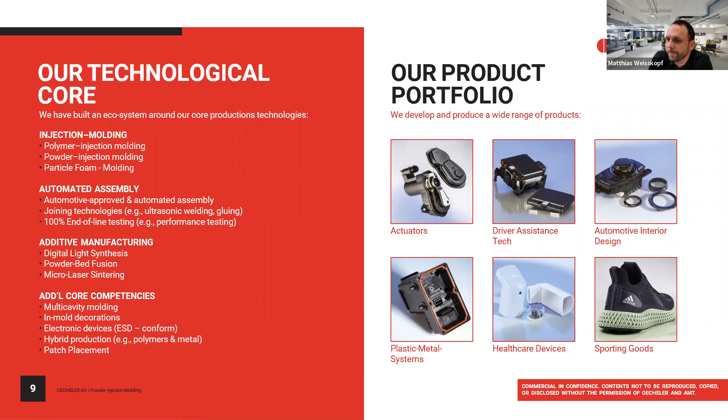You have to offer a huge variety and therefore also a huge variety of post-processing solutions. And that is mainly one of the reasons why Joseph, or AMT, and Oechsler started this program. So Andy, you can hand over to the next slide.

As Matthias mentioned, Oechsler is a productive company using additive manufacturing for regular production. I think that's also the main difference between Oechsler and a regular service bureau or a service partner. We are not the regular printing farm who does prototypes, one or two parts, and then never seen again. We are really going for serial production on a long term, meaning the product is going quite a little while.

Therefore, from a printing fleet, as we do serve kind of all industries, you need to be able to serve volume. Meaning we are running right now 150 printers in serial production plus development printers. We always have one or two not-yet-available serial equipment in development, just to be ready for the next topics. Our turnover in parts is around 1.3 million parts per year, and here it's really a continuous project work and production, meaning bigger projects, really also projects with 6 figures when it comes to the customer needs.

For sure, you see here now four technologies. Even a liquid version, which is not the focus for today, but this was one of our earliest technologies we did bring into serial production. Now, today, it's really the focus for the HP technology and MJF, and I think that's really the key.

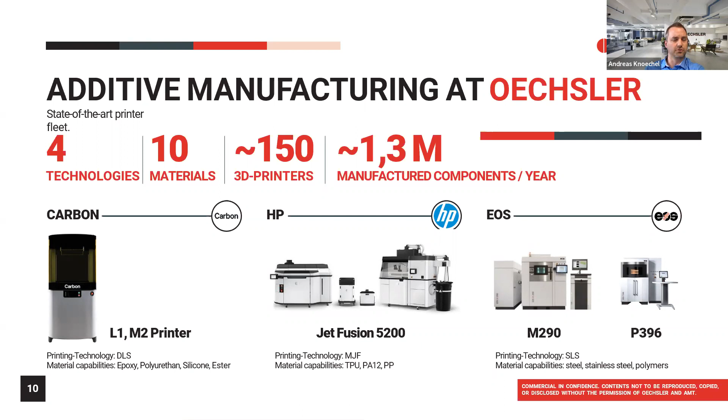So when we started in 2017 with the additive topic, we clearly evaluated the potential, and the result was that we don't want to replace, or that it doesn't make sense to replace, injection molding. We have more than 200 injection molding machines worldwide, perhaps even more than 300. Injection molding is a process that is well known and that can be really cheap even for large quantities. So what does that mean? You need to offer products that present new possibilities that a classical manufacturing technology cannot offer. And this is where we started with the lattice topic.

So lattice doesn't need to be a flexible material. It can also be a rigid material, but in general it is a special version of structures. And when we started in 2017, we realized pretty fast that there was also no software solution on the market to generate those lattices.

It's almost the same as the link to post-processing or to manufacturing technologies. There is, of course, software generating lattice, but we need a linkage to, for example, mechanical properties of a product. A customer in additive doesn't want to have five different correction loops until he receives the first part that somehow manages his requirements. You need to hit, hopefully in the first shot, the requirements the customer wants.

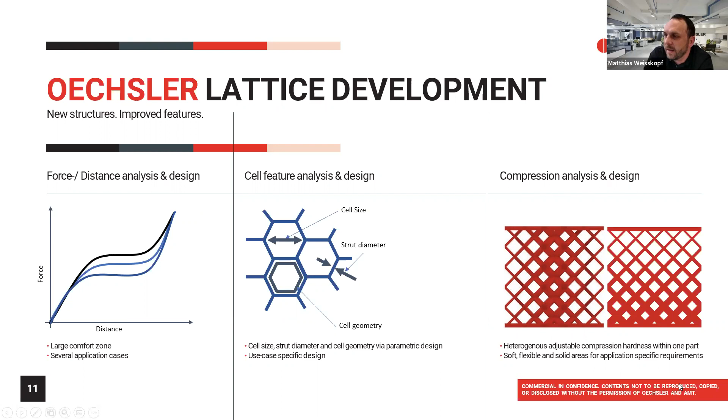deviation of the CAD file to the real product has a huge impact on the performance of the product. So that is the reason why we need end-to-end means, starting with development until the last production step, and linking also the results, also the quality inspection, as the more products you produce, the better the database for your product development is. And Andy can give you now a short overview about the products we are talking about.

So what you see here is, I would say, a small variety of products but a wide range of industries. Meaning, Oechsler sure is working a lot in the field of automotive, but in additive manufacturing we are almost completely open, I would say. Why? Because we do see here the possibilities and opportunities really to bring different functions into different products.

What you see here on the left side, it was one of the starting projects. It's the automotive seating—one seat project is already live available. It's a Porsche sporting seat. The complete inside is made out of additive manufacturing lattice components, meaning we took the foam out, brought new parts in it, and here you can completely adjust the hardness like the driver wants, or even have different seats available depending on whatever the driver wants to have—soft, hard, middle, medium.

But also for sure the ventilation, the height is different, meaning we do need less volume. In the weight direction, by saving less volume, you can save a lot on the rest of the seat. So you see, it's not only about a new technology and something new going into a product and the customer only takes it because it's new. No, there is really coming more and more benefits into the product, especially in that serial production or available serial production.

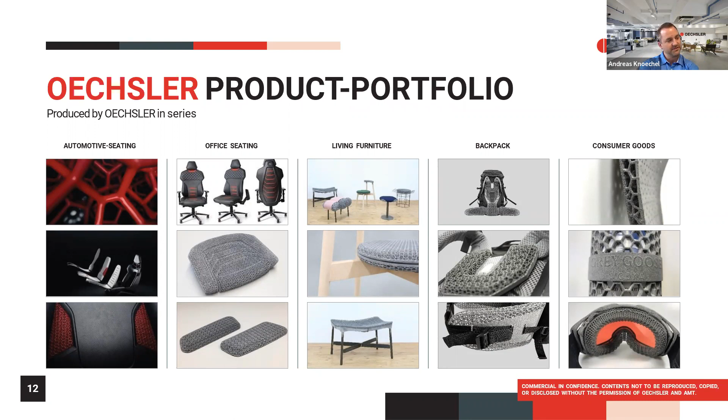And maybe, Alicia, if you would please slide to the next page. Andy, not to interrupt you, but there was a question, and I think it's right to answer it here.

There was a question about an example of a lattice product of a rigid material. I cannot mention the product itself, but I can describe the functionality. It is a crash element. The normal standard product is a hybrid part, a complex part of plastics and metal combination, to absorb a lot of energy in the crash case. And you can reach the same result just by generating rigid lattices, but you save roughly 70% of weight and a lot of space. And it is not used in mass production because it's really a challenge to convince customers

changing and challenging the existing technologies and the existing product development techniques. But those are examples, for example, for a rigid lattice product. Hopefully it is answered.

Coming back to our post-processing issue, what you see here somehow looks like the regular depowdering method you're using all day long. On the left side, it's still packed. You take it out of the printer. You see it already, two hands, meaning everything manual. Unpacked, especially on our lattice products, everything is completely full of powder. Still after the air blasting, it's not clean at all.

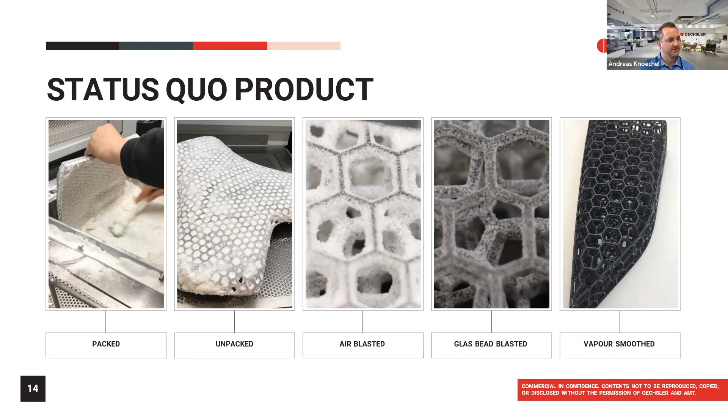And that's really what it's about today. Within the partnership of Oechsler and AMT, we are bringing a solution to the table which does the job faster, easier, simpler. And I think the next slide will show us that it's not only that we need it for scaled production.

What you see on this process flow cost scenario: the machines, sure, they do cost quite a bit of money, but by having everything handled from step 1 to step 2, having everything controlled, being so precise, being careful everywhere, you do see almost two-thirds is the labor costs.

And when it comes to our customers and products, I would say within the top two questions, one question is: why is it so expensive? How much does your product cost? That's why we really have to tackle it on that side, to bring 3D printing into a more simplified costing structure.

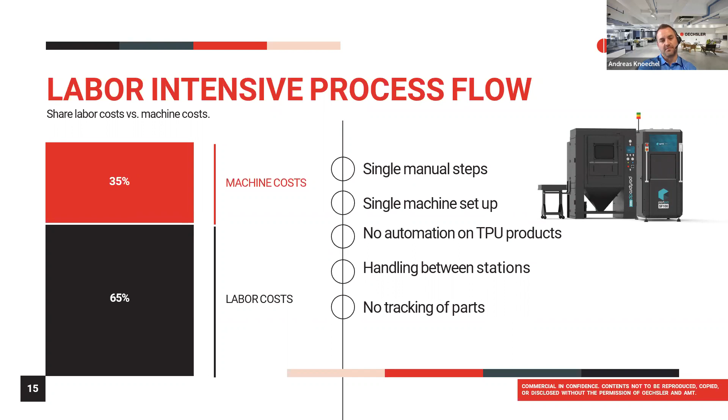And on top of that, but I think later on we come to that, there will be not only a costing topic—there will come quite a lot of other benefits when we solve that issue.

In parallel to this, it's also, of course, the variety of products. So it's different if you have a small product or a huge product, if you have a vapor-smoothed product or not. So the process steps are different and they are not leveled. So what does it mean? You need to have a flexible production solution, and just multiplying different single machines will not solve the issue.

Even when you put some interim automation inside, it would also only be a one-time solution. So it needs to be a flexible solution. And even when Andy mentioned the post-processing, we shall not forget the pre-processing, or what happens after the post-processing—reusage of material, being prepared for the next print jobs, and of course 24/7 manufacturing so that it is efficient.

That is the challenge. Thank you, and a great summary of the current status quo, highlighting that even with machines to automate the manual workflow, it still doesn't suffice in terms of producing the full end-to-end scalable production.

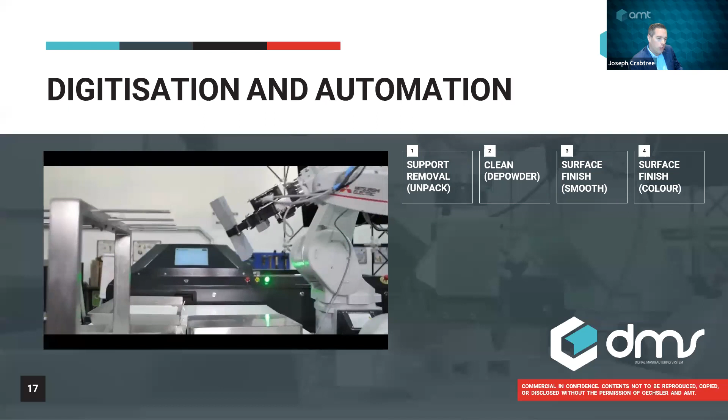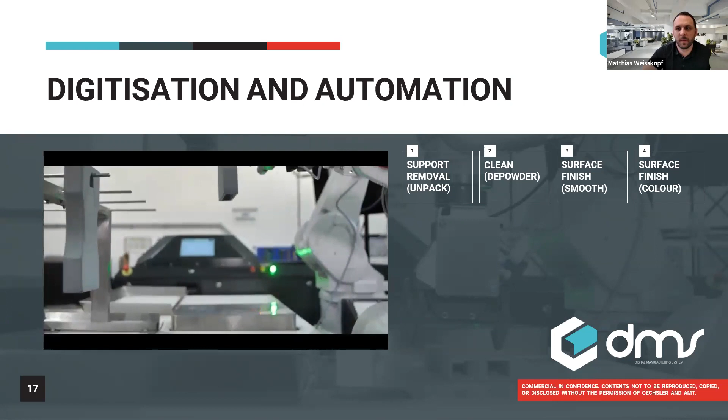So with that said, we're going to talk a little bit about what we're doing in terms of the partnership. This really is about the full end-to-end automation of the process flow. So we don't just mean individual modules which are not scalable; we mean the complete integration of all of the key process steps.

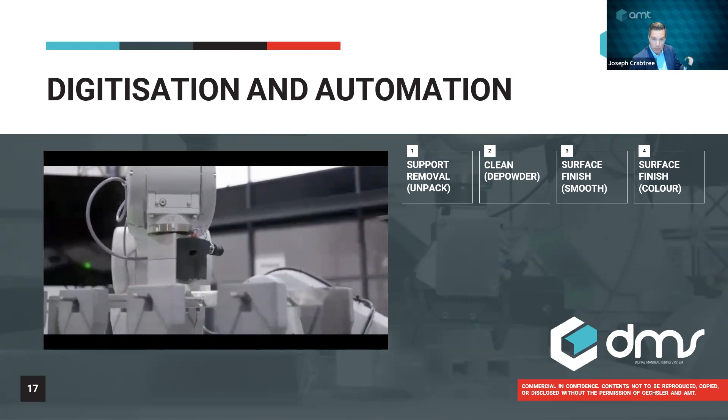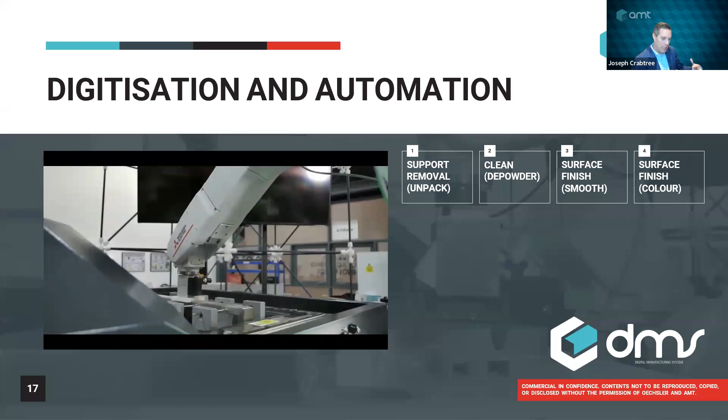Those process steps, as Andreas and Andy were saying, were unpacking, the removal of the part from the printer, the cleaning—which is very complex on lattice structures and this flexible polymeric material as well. And once we've done all that cleaning, then there's aspects of recycling and powder management that we need to deal with as well.

Once we come out of that, though, we need to deal with the surface finish. A lot of the applications we've discussed and shown are consumer or critical aesthetic applications which need a very good surface finish, i.e. to be smooth.

And/or to be colored to a certain color hue or matched to a certain specific coating, for example. So really this whole process isn't just about removing the part and cleaning the part, it's about how we functionalize

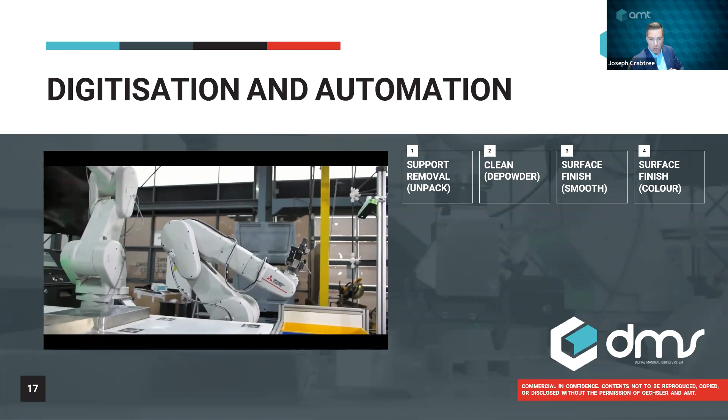the surface, how we improve the surface, and how we automate the full end-to-end workflow. So this is in essence what we're doing with Oechsler. We mentioned before it's not good enough just to add machines. So if you've got a number of printers, we can't just add more and more post-processing modules.

So AMT and Oechsler have developed a fully integrated solution that allows you to truly scale additive manufacturing. This is a representation of the cell that has been developed. We'll be releasing more details in due course over the coming months. But in essence, I'll just walk you through the workflow from a fairly high level point of view at the moment.

This is a scalable solution. What I mean by that is that it works with any printer platform, it works with any materials, and it works with any number of printers. Our ideal number of printers per cell, per manufacturing cell, is around 10 printers, and we classify those as 10 industrial printers. In this case, it's the HP Multi-Jet Fusion 5200 platform.

So we're talking high volume industrial printer production and a high number of parts serving these cells at once. We then need to manage those printers. So in essence, we're taking the build beds using autonomous guided vehicles. We're taking the build beds and docking them into our system.

So think of it a bit like the space station. You know, you can dock certain capsules into it. That's exactly what we're doing with our system. We're taking any printer build unit, docking it into our fully turnkey modular solution.

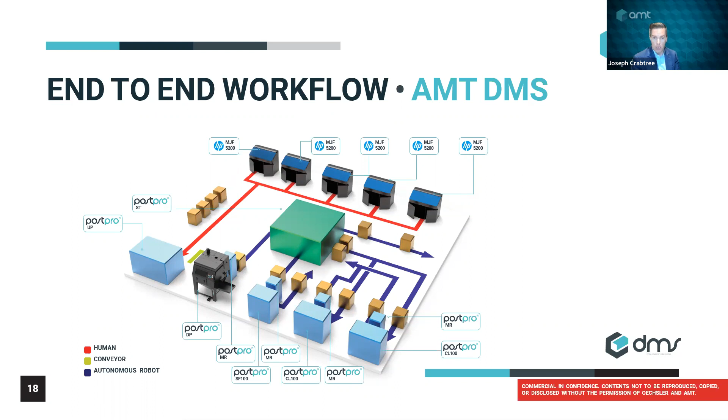Just a little bit about—I mentioned that this isn't just about cost reduction. Yes, it's important to get the part at the right price, and by doing that it enables us to scale additive manufacturing. It then becomes competitive with other manufacturing technologies and makes the buyer or customer's decision that much easier when we can produce parts at scale at the right price.

We mentioned some of these benefits before, but we are talking about scaling manufacturing here—tens and tens of printers, millions of parts. And we talked about this digital twin concept, that we're not just printing parts and not knowing what's happening or how they're being traced. We're creating digital twins. We're integrating that with the manufacturing software of the facility.

We're integrating that with the printer software. We're integrating with any downstream manufacturing processes. So this truly becomes a fully integrated process that achieves consistent, reliable quality every time. Andreas, do you have a few words on this?

Definitely. When it comes to quality, you saw a wide range, automotive to consumer goods. And meanwhile, everyone in the past would say, yeah, consumer goods, let's just print it. No, the customer expects good quality, and not only good, it must be on the same consistent level. Maybe not in every detail, but the part quality that needs to be achieved is really very similar. Even if it's at the end a shoe and not a car seat, it still must perform physically and optically so that the customer likes it and wants to come again. So quality is really one key.

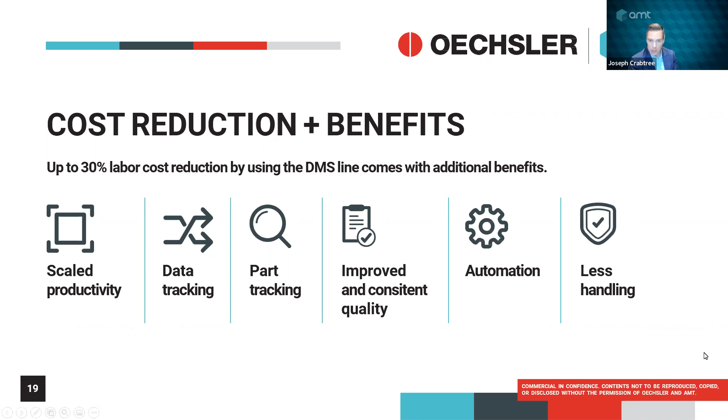So just really finally, in conclusions and summary—thank you all again for attending, and thanks for your questions so far. But really just in summary, we mentioned at the beginning that partnerships are key. Neither party could do this on their own, and it's by combining our unique skill sets that we're able to achieve what we're talking about today.

And we really value the partnership, and we believe that through this partnership, we truly are going to deliver the world's first end-to-end production system that's scalable and producing millions of parts, end-use parts at scale very soon. This is about replacing manual processes, automating processes, driving down costs, but it's so much more than that. It's about maintaining the quality, increasing the repeatability and reproducibility, and producing a true manufacturing technology, not just a technology that's 3D printing.

We've divulged some details here. We've not given you all of the magic sauce. We'll retain that for ourselves, but we will be able to divulge and discuss further details, further applications that we're developing in the near future as is appropriate. We'll discuss those results publicly at an appropriate juncture.

But really, just to leave you with a thought, we're now looking at real life applications, real life production, which is super exciting. And that's been enabled by this partnership between Oechsler and AMT.

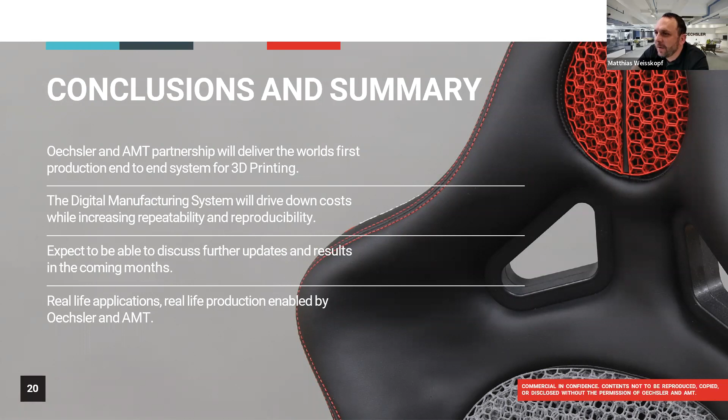And from my end, as I'm sometimes, or very often, very critical, a lot of new technologies and a lot of new companies rise in the additive field. A lot of people promise, but in the end, on the processing side, not really a lot happens. And if you want to develop new products, you need to have those solutions on hand, because without those, you cannot scale and you cannot produce those products in huge quantity. So it is a must-have for scaling. As Oechsler is a manufacturing company, we don't earn our money with developing fancy products that are produced one time, right? We want to scale production and produce huge quantities and grow the business. So it's a chicken and egg discussion, of course, but this is definitely an important portion of it.